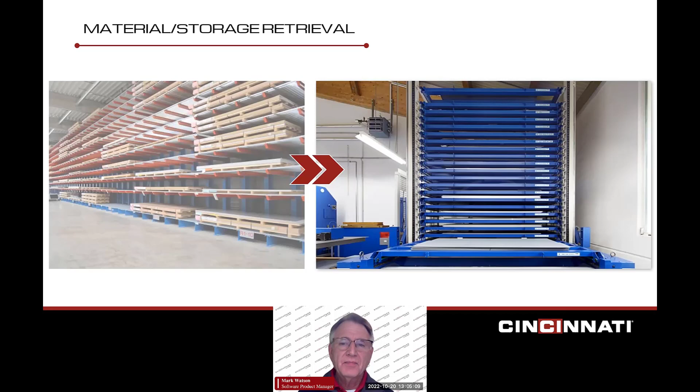So there are throughput advantages here, not to mention what might happen on off shifts if you can run lights out.

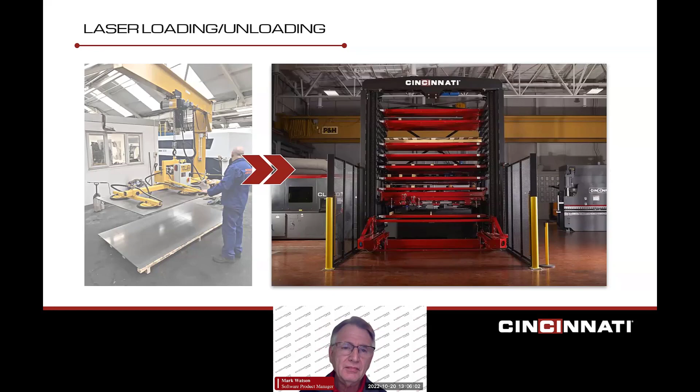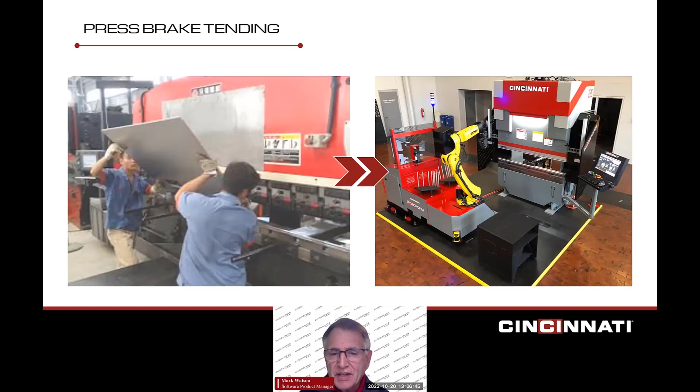On the right, we've got the Cincinnati RoboForm product for handling small parts. It's a smaller machine, but we also do robotic integration for larger ones as well. Some of you have even done this type of automation.

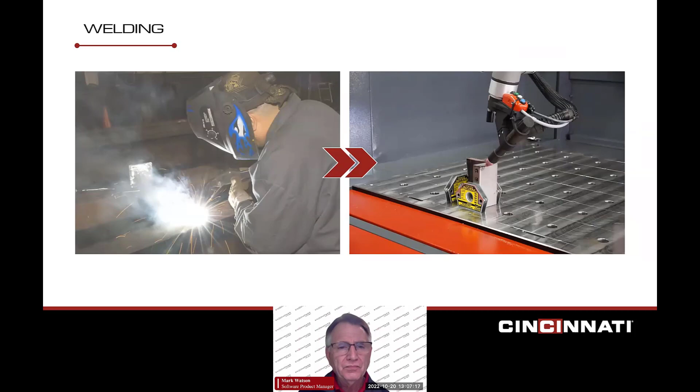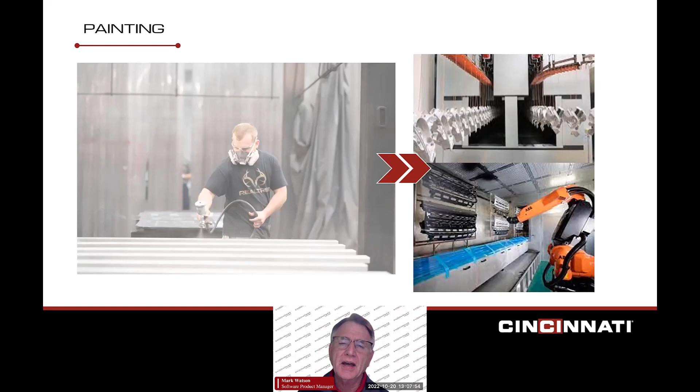So you can see there are a lot of types of automation that can really help.

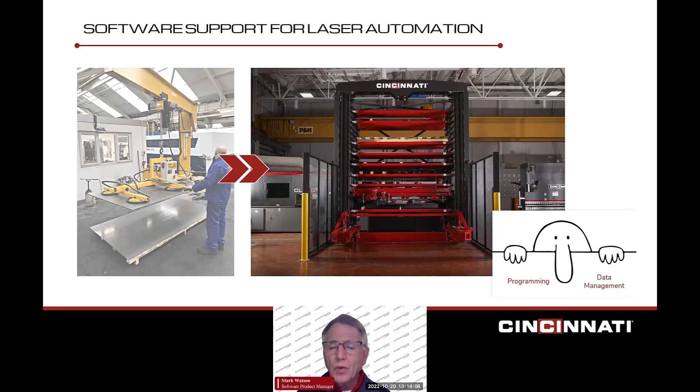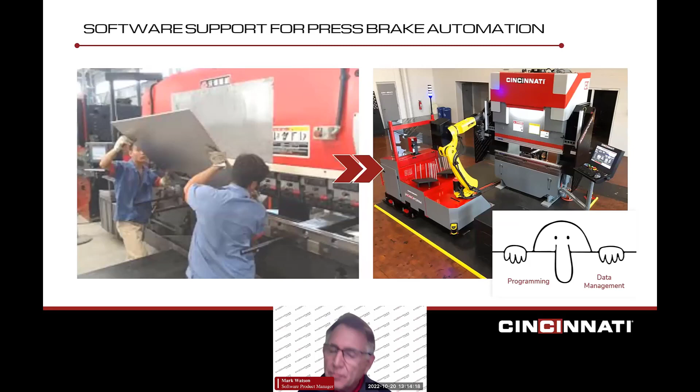Well, I'm going to co-opt this graffiti. Instead of saying Kilroy was here, I'm going to say programming was here. So I want to point out that in this example, laser automation, it's great to move toward laser automation, but with it is going to carry a programming load. Similarly with the press brake, we can add robot tending to a press brake, but we're going to add a programming load to that as well.

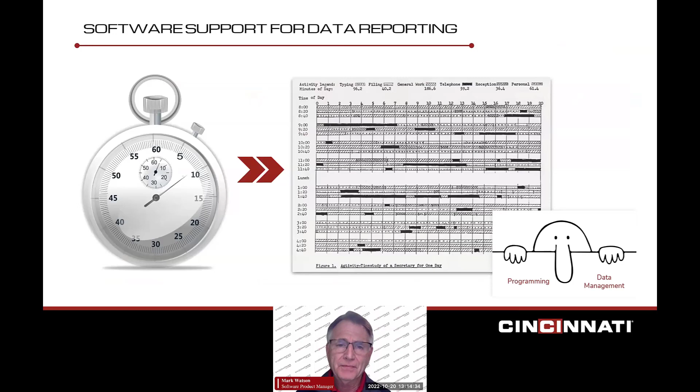Similarly with painting, similarly with welding. And then finally, when it comes to data reporting, also the analysis of data and working through data, there's a data management load as well. So I want to point that out because we think often of work consolidation, work simplification out on the shop floor. But if we bring it to the office, we're just moving it around. Software automation has a really big effect on trying to reduce all of that.

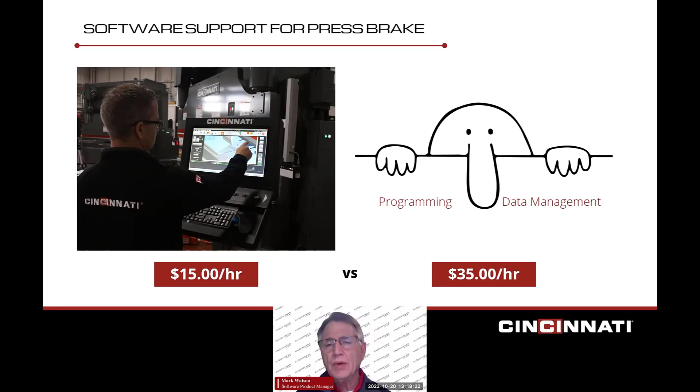Came back in a couple months. He said he was going to do it. I asked, are you programming offline? Yep, he said, I'm programming offline. I asked, what do you think? He said, well, it's kind of what you said - the machine's got much more throughput than I ever thought. That's really great, but he said, I got to tell you something: by moving the programming from the brake to the office - and these are dollars he mentioned back then - I went from programming with a $15 an hour guy to programming with a $35 an hour guy. How's that good? He said, I took 2 steps forward, but I took 1 step back. So my question is, does software automation have something to offer somebody like that?

Well, he gave me a goal. He said, offline, I want to create the same number of programs - they've all got to be created, right? And the programming dollars I want to spend, if I move that offline, I don't want to spend any more for it. The program dollars must be the same or less. So if we do a little calculation for him with his ratio, he needs to program in 15/35 of the time, or 43% of the time, but he's got to do the same number of programs. So how do you do that? Well, that's where software automation comes in.

And what I'd like to do is show you an example here with our Cincinnati BendSim Pro software that deals with batch programming. What you're going to see in this video is us moving from a source file of solid models to an output file of finished programs and setup sheets.

That's only if you want, right? But if you want to do setup sheets, they're made automatically. There's not much manual input. And with something like this, it's 50 to 75% successful. It's not 100% successful because there are difficult press brake parts that just can't be simulated to the same extent as what a really creative person is doing on the floor.

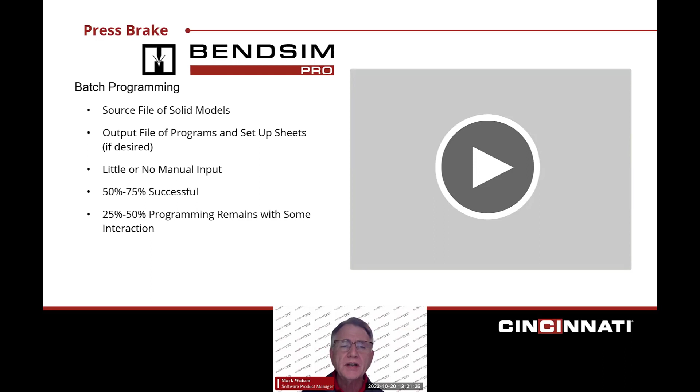But what that does is it leaves the programming workload for the person working offline to be really about 25 to 50% of what it used to be for those more difficult parts. So here, I'll go ahead and play this video, and try to narrate a little bit about what's happening.

What's going on is we're going to the create a batch page, and we're just going to choose parts that we can make. In this case I'm just choosing 4 parts, but it could be the entire folder, it could be 100 parts. Then we'll choose how we're going to execute it - do we want to do it sequentially, or do multiple parts at one time? I just did it sequentially.

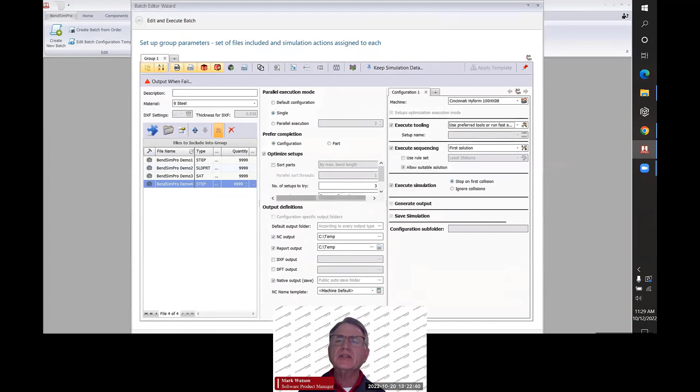I'm also going to choose where these parts, or at least the programs for the parts, and also where the setup sheets for these parts are going to go. I'm just putting them in a temp folder here. And then lastly, I'm going to say what method of tooling these parts - how are we going to do this? Are we going to go through all the tools, suggested tools, or whatever? In this case, I was just going through recommended tools.

We give this batch a name, and then click execute. What's going on now is for each part, it's just going through a 4-step process of finding tools, developing a sequence, making multiple stations across the press brake in the simulation phase if necessary, and then making the output code for the machine and for the setup sheet. It's just jumping from one to the other.

In this little video clip, this takes, I don't know, a minute and a half, 2 minutes roughly for 4 parts. So if we say 40 parts, it's 10 times that - we're talking about 20 minutes for 40 parts, or 400 parts in 200 minutes. You can see that it's doing quite a lot of work in the background for us.

And some of them will ultimately fail, and at that point we get a report on what those are. And then we can go back and use some of the automated features to help us essentially manually program those one by one. But it really reduces the workload of a programmer.

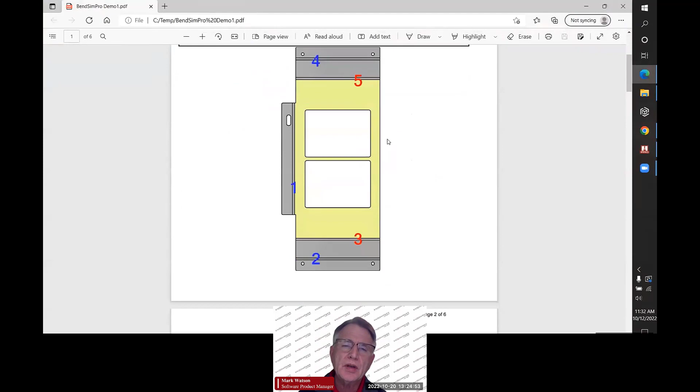What you see here is we're opening up the setup sheet for one of those first parts that we made - the flat view, the form view, and then turn by turn instructions. All this was created for each of those 4 parts, as well as the code and the graphics that will run on the machine. And there they are right there.

Let's also talk a little bit about the laser, with Cincinnati's Nesting Pro software. We can do a number of things - we can go from a solid model assembly, split the assembly apart, and program the laser and the brake from that. We can also trigger an order from an ERP output. If we're generating a CSV file, we can automatically populate that nest and have all that run for us in the background. And it doesn't have to be one nest - we could populate a week's load of work from that ERP order. So there's some really neat things on that.

So we start with a source file again, this time of solid models or flats or pre-programmed laser parts. We can mix and match with that. And if we're using a solid model, the Nesting Pro has a built-in unfolder to unfold the solid model into a flat based on how you would unfold it, using bend deduction tables that you modify to your liking.

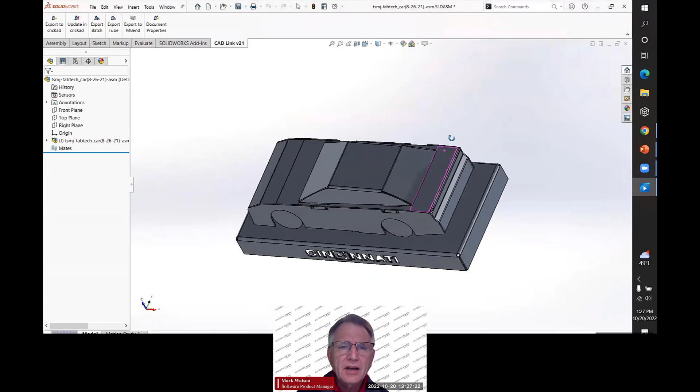But here, I'll just go ahead and start the video I put together on this. This one happens to start in SolidWorks because we're going to use an assembly. In fact, this was an assembly we had used at Chicago at the FABTECH last year, just something I could grab onto. It was a stock car with a number of parts.

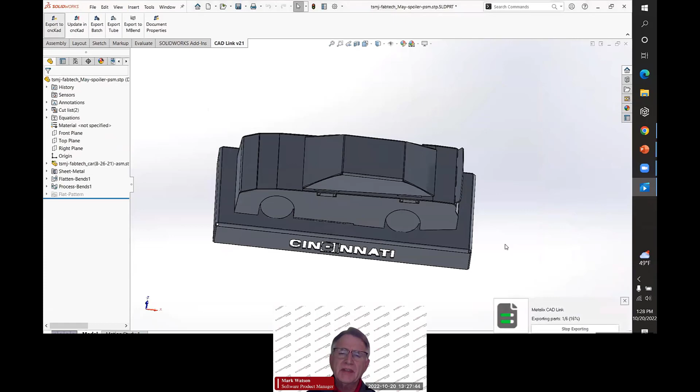With this, you see, we can go over and split this apart. When we do that, we instantly identify which are the sheet metal parts and which are not. In this case, they're all sheet metal parts. Also, we can map the material - in this case it was stainless, but we can map the material for each of the parts in the assembly.

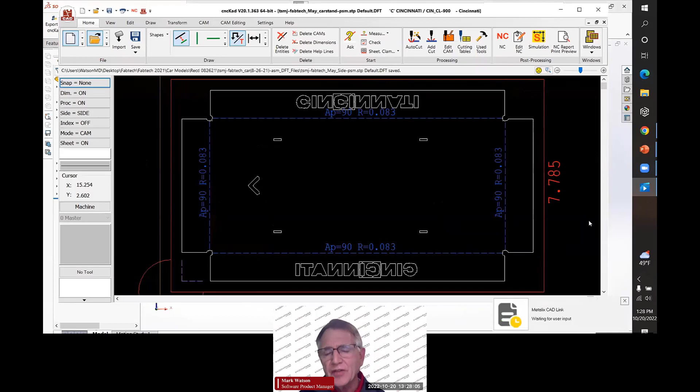Into our nest, so naturally we can mix and match materials in our export and then make nests accordingly. But you can see what's happening. Naturally, this is a video, but if it wasn't, I still wouldn't be touching it. It's running automatically and splitting everything apart into ready-to-nest parts. Also, you notice these have bend angles and inside radii on them, so these are not only ready for nesting, they're going to be ready as well for automated bending.

And then here is our report file of what we split out of the assembly. We can just click on, at the bottom, start a daily job, and then that launches these parts right into our nesting software. That's launched automatically in the background. Here, I'll get rid of that. And then you can see all of the parts now have been given to us in nesting.

We can come across and look at the order if we want, we can even edit it. What if we want to make 100 of these assemblies? We've got a multiplier here - we take 100 and click on the times button right there and see our quantities. If you notice, our quantities all changed to 100.

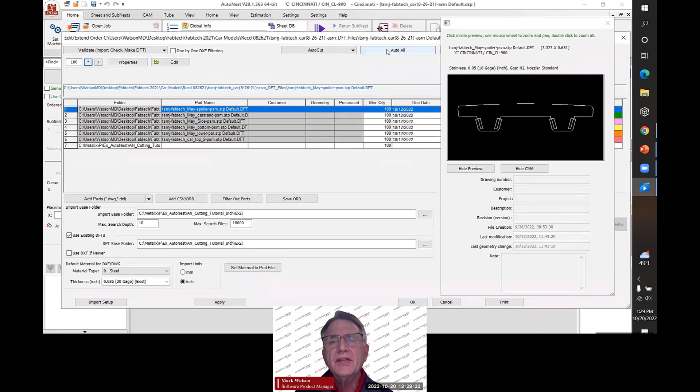And then we now click Auto All. What Auto All does is it checks all the DXFs to make sure they've been made properly, and if they're not, it corrects the errors. And then also it applies the cutting conditions for this material for these parts, and they're ready to go.

And now we just go ahead and run these. What you see happening here is multiple nests of material being made, actually rather quickly. This was completed in 10 seconds, but here are all the nests to create 100 copies of that stock car assembly with all the parts. And then with that, we can go ahead and create the NC code and we're ready to go. So that is something that we can do.

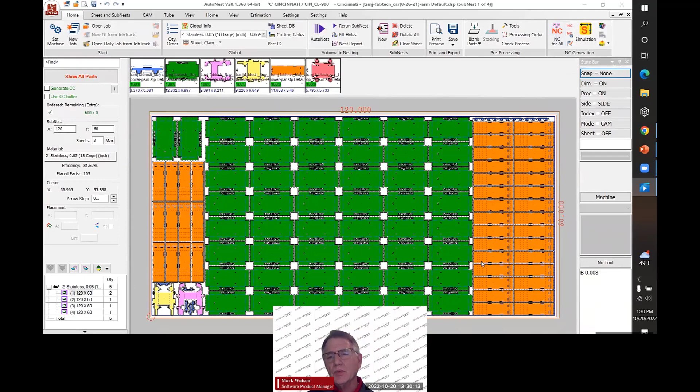And finally, if you want to do the very same thing from an ERP standpoint, you can send the script and all this will run in the background and then just put the programs in the receptacle of the output folder. So that's nesting. And then lastly, I just want to mention data reporting.

With Cincinnati CIBERDASH, what we're doing is we're data mining our machines, sending that information to the Microsoft cloud, the Azure cloud. And then from there, we could take that data and give you password protected scoreboards and phone apps and all the things that go so that you can see your data and manage things on a day-to-day basis.

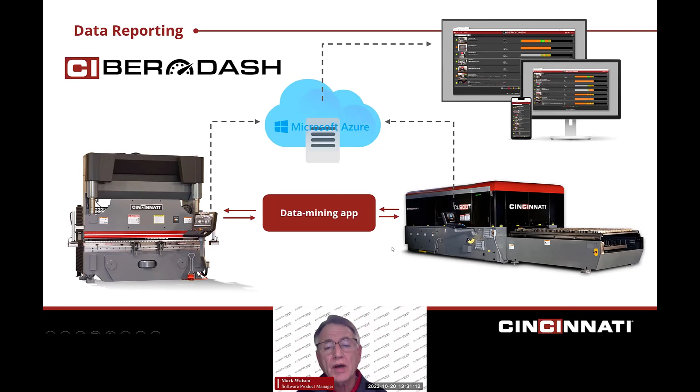Now, some people might have the question, well, that sounds great, but what if I have a third-party dashboard? Well, what we can do is we can do the very same kind of thing, but we can output data from the cloud through API calls to your third-party dashboard. If it's a dashboard that works with the cloud, we can go cloud to cloud and give that information over so that the Cincinnati machines report to your dashboard that has not just Cincinnati machines, but others at the same time.

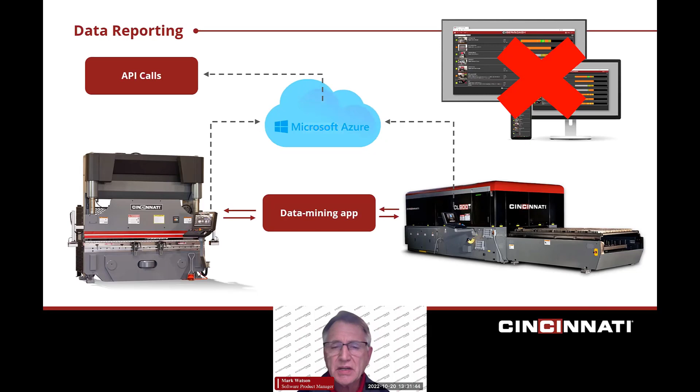Similarly, you might say, we don't want anything to go to the cloud, we'd like things to stay within our walls. We just like the same data to come out via OPC UA format, and it's similar to your MT Connect. We can do that as well.

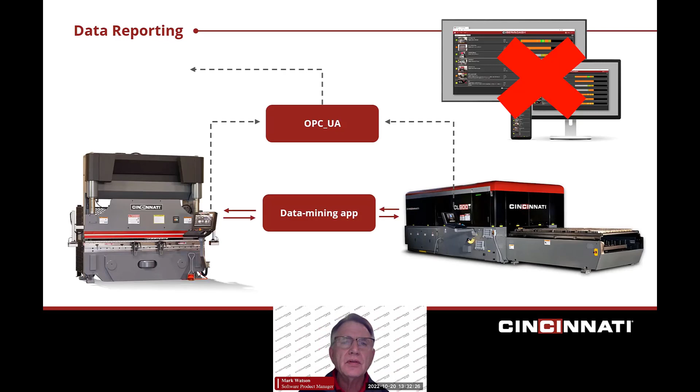So instead of using the Cincinnati dashboard, you can go to your own device within your walls and make a dashboard that ties the Cincinnati machines in with a paint line, welders, and other devices that Cincinnati doesn't make. So that's a summary of how you could possibly tie the machines in.

Remember, all this can be on a scoreboard on your shop floor to alert you to what you need to manage. But when you show up at the workstation, you can use your smartphone and see these same screens, discussing with an operator a fault code that might be coming up more often, or why the machine went down at a certain time.

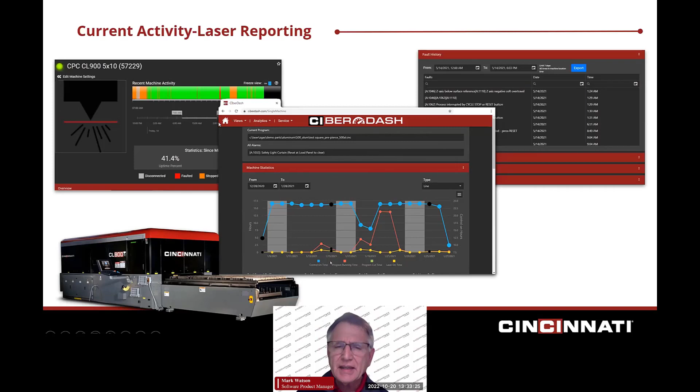This is for the laser. The press brake screens look a little different. The first one's very similar, with the progress bar. The second screen's kind of interesting here.

For parts where you've got a history, today's graphing is shown in yellow, graphed against the maximum rate this part has ever run, which is the red line. The minimum rate it has ever run is the blue line, and the average is the green line.

So it's good information to have a discussion with a supervisor or operator to say, this is how I see you running it versus historical data, and you can use that right now to manage. Also, in the background, there's a light green or light gray representation showing the accumulation of finished parts throughout the production run, and it's growing.

And then finally, the fault codes that we had on the laser—similarly, we can show you fault codes for the brake.

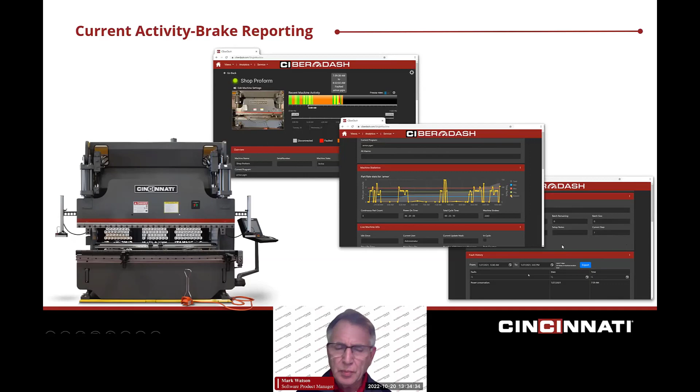It wouldn't be much of a data reporting system if we didn't give you good data you could pore over time. We can give you raw output data that you can use for essentially an Excel manipulation. We've got one customer with around 30 press brakes tied into a system like this, and their engineers have come up with their own operator evaluation method and program format using this data.

But some people say, I don't have time to do that with Excel. What have you got that I can look at immediately?

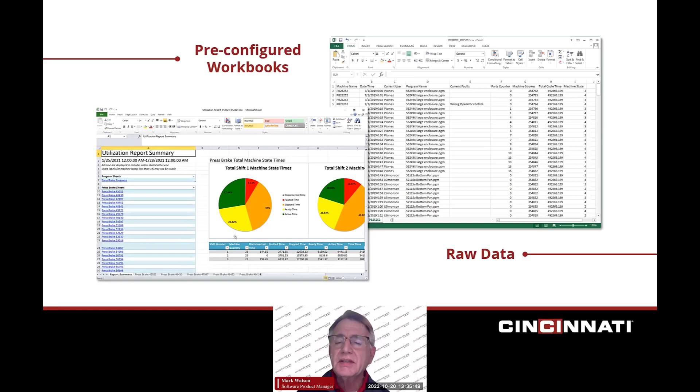So we have pre-configured workbooks where you can download the data, choose a start date to a finish date, show all your press brakes, and each will show a graph of that machine's performance over time. You can also sort by operator, by part, all kinds of different things. So on the data gathering side, the machines can now be part of the process in supplying you with data you can use to make data-driven decisions.

To summarize, what we're all about with software automation is not replacing the things you do—we're just trying to do them more efficiently. We're trying to reduce the workload on blank development and resizing, and reduce the workload on machine programming by doing some automated batch type work, so you're only programming by exception.

We have some inventory management tools that I didn't talk about. You also saw nesting going directly from a solid model to creating a nest for 100 reps of that assembly in less than 2 minutes. It's very, very quick.

Machine load balancing, we have that with our scheduler product. Our nesting has quoting and estimating built in, so you can do your nests and spit out a quote for your customer right off the bat. And finished work reporting and data management—we've got that as well. I won't go through everything, but you can see there are a lot of things we can do to help reduce your software workload or programming workload.